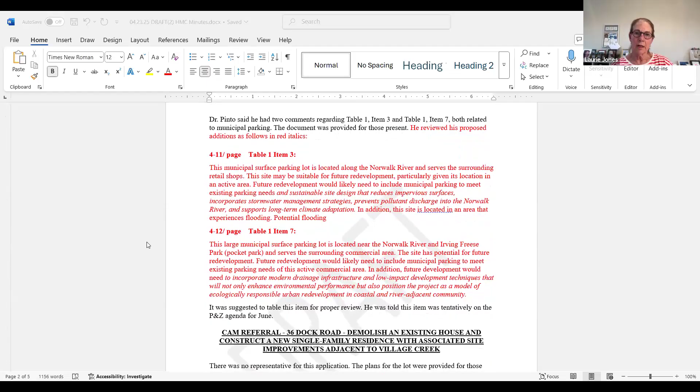Based on our legal review training, we're handling the latest minutes a little bit differently. Since the version you've seen, which is posted on the website, Dr. Pinto had a couple of edits. Amelia, you'll share your screen, and we'll go over those edits and then vote whether or not we approve Dr. Pinto's edits. They are in red. If you'll scroll down, we can all look at these together. These are the same language proposals he had raised at the last meeting, which we tabled to give commissioners time to review. Dr. Pinto asked that these be included in the minutes from last month to show that we had seen them.

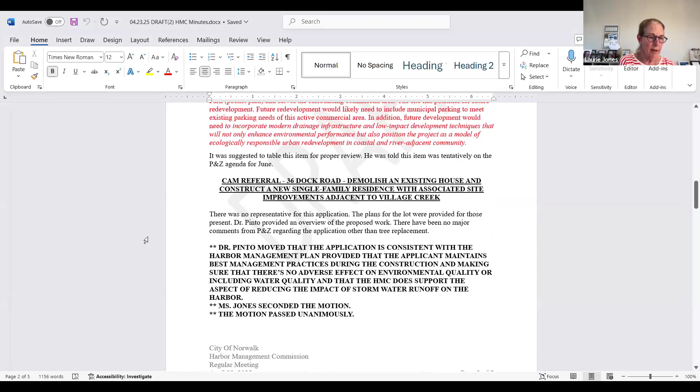This is the same language that hopefully you've all read by now, since it was sent out for review at tonight's meeting. Those are the recommended language changes for Table 1, Item 3 and Table 1, Item 7. Scrolling down, there's just one small language change in Chris MacDonnell's Finance Committee report, clarifying that the grant that was declined was from the city. It doesn't change the meaning of anything, but it clarifies it in a good way. So those are the three changes that were made.

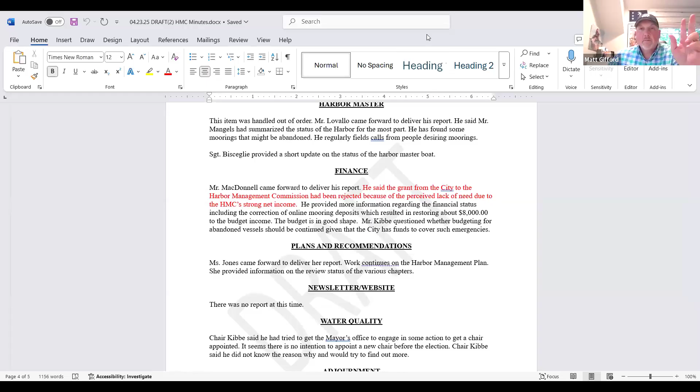Given those, do I have a motion to approve the minutes from our April 23rd meeting? I'll make that motion, Laurie. Thank you. Is there a second? Second. Thank you. All in favor? Aye. Any opposed? Great, the minutes are passed.

And that is the end of that portion of our meeting. Thank you very much, Laurie. Moving right ahead, the Application Review Committee - we have a lengthy agenda tonight.

Dr. Pinto: Thank you very much, Mr. Chairman. Just to re-echo what you talked about regarding the agenda - what I was trying to do, to expedite things, I consolidated by agent. So I've asked that, for example, Mr. Jim Bajek, who has two applications, go first and second, and then move along to the other agents, lumping them together so we don't have to jump back and forth between each participant. So the first item on the agenda is 86 Bluff Avenue, which is a COP.

This is an applicant from Phillip and Erin Kerr, requesting approval to reconstruct an existing dock and seawall currently in fair to poor condition. The seawall is approximately 120 feet in linear length and will be rebuilt first, raising its average elevation from about 7.1 to 8.1 feet through the addition of approximately 9 cubic yards of stone and mortar. The work will be completed using hand labor and a small operator-controlled mobile lift on the upland side to minimize any disturbance to the site. Following the seawall reconstruction, the dock will be replaced in kind with minor upgrades.

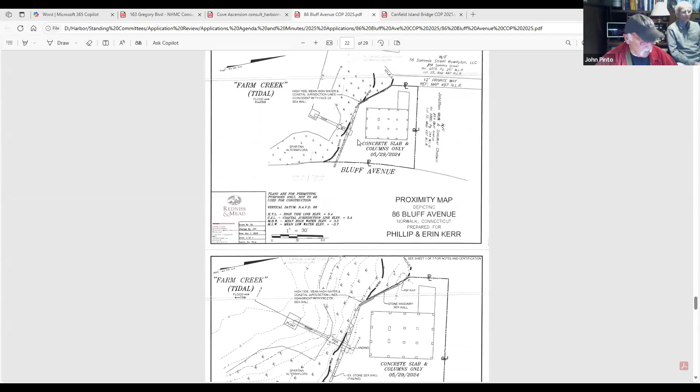Oh yeah, I guess we neglected to put them in. The dock is where it is, where it was permitted previously, obviously, and we're well within the 25-foot setback on both property lines. We just erred by not showing the extension of the property lines. So I hope that's okay in this case.

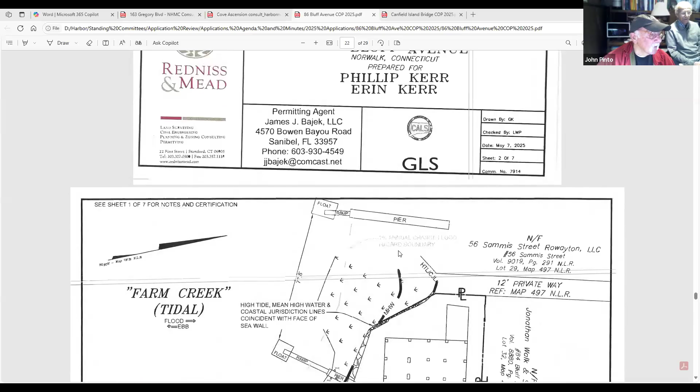I think with the understanding that the drawing would be amended to show the lines. Yeah, well, drawing, that's true. We have, let's see, this is it here, right? Yeah, we can certainly add that to the plans.

The property lines with Bluff Avenue, it's kind of hard to show an extension of that because Bluff Avenue's property line is curved. I don't know, there's certain rules usually followed with regard to the riparian rights. The surveyor knows how to do that as far as the curvature of the land, whether it follows a certain set point or some permanent boundary. I'm not exactly sure how that works here.

Well, we can certainly add those lines into the plans. That would be appreciated, Jim, just for completeness. Sure, be pleased to do that. Everything there is properly permitted. Yeah, there's nothing that's unpermitted.

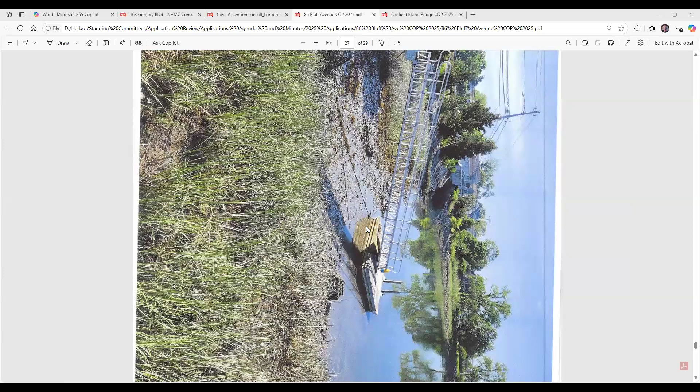Well, this was a dock that was previously in place, and you had permits previous to this application. That's correct, yep. And that was shown in that application here, I guess that was later on. Yeah, the dock was originally permitted in 1996 to the previous owner, permit number 1996-01383-MG.

As you see here from the example, the previous dock doesn't have float stops, for example, it's sitting on the bottom right here. Is that correct? Right, yeah. So that's going to be a change where you're going to have float stops to prevent the dock from sitting on the bottom for any appreciable tide cycle. Exactly.

And we're raising the pier elevation to coincide with DEP's requirement to have the bottom stringer at least 5 feet above mean high water. Right, right, okay.

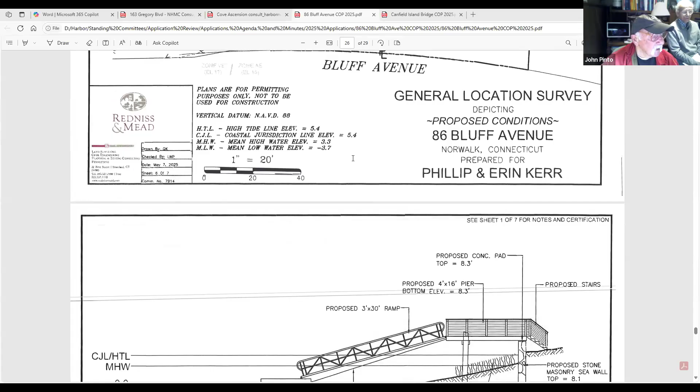No objection, with those understandings, that the drawing will be amended to show the extended lines and the distance between the proposed structure and the lines. Does any of the commissioners have any other comment or questions they want to ask?

I didn't really see any other changes, John, other than the float stops and a couple of elevation changes. Was that pretty much it? That was as far as I've seen, yes. Yeah, the pile's going to be reused and it's an improvement. So absolutely, yeah, it seems like a no-brainer.

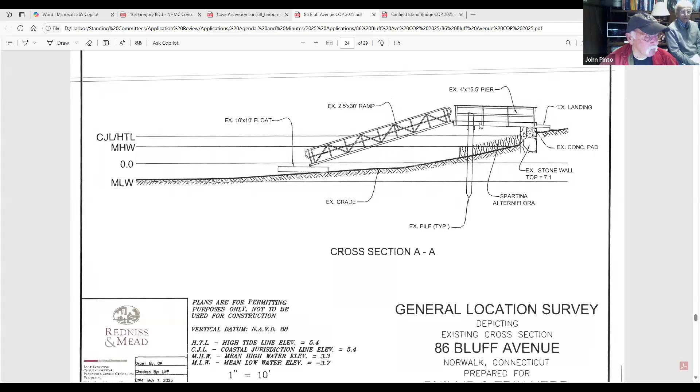In that instance, John, do you want to say it's consistent with the harbor management plan? Yeah, I guess we would certainly have no problem, no objection. It's pretty much the same, but it's certainly an improvement based on the previous dock structure there. Could make an argument it's consistent with the management plan.

So if anyone wants to make a recommendation that we find the application may be consistent with the harbor management plan, with the caveat that the drawings would be redone to place the riparian rights or riparian lines on that project, and then move forward with the project.

Yeah, John, I'll make that approval and put our standard language in with that association. All right, so that's 86 Bluff. We're going to find it consistent with plan. And then with the riparian lines, littoral lines, yeah, drawn in on that.

All right, all those in favor with that? I'll second the motion. Thank you, Jim. All right, all those in favor? Aye. Aye. Opposition? Any abstentions on that? Okay, so moved. Good. Thank you very much, Jim.

The next project is Canfield Island, Jim. This involves the Canfield Islands. It's a special taxing district, and they're seeking approval to perform necessary repairs on the existing bridge accessible to Canfield Island from the shoreline down near the beach area. The proposal supports a Connecticut COP application and includes a detailed inspection report with photographs. It's quite detailed.

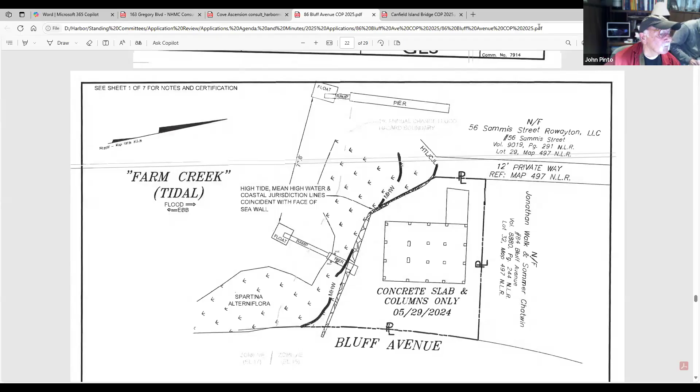Let me see if I can pull that up here. Let me stop sharing here. Where's it? Oh, here's stop share. And we have Canfield Island here. Okay, let me see. Is that still, are we still sharing? No, we're not still sharing. Hold on. Share. And we're going to share here.

Okay, all right. So what we're looking at here is the Canfield Island Bridge. Sprite Island Yacht Club is down in this direction here. And this is the Canfield Bridge, the Canfield Island Bridge, which they plan to refurbish.

I can briefly cover the scope of work. The scope involves support piling rehabilitation. Each existing pile will be encased in a fiberglass reinforced plastic and carbon fiber sleeve, extending approximately 2 feet below the substrate. Metal reinforcing rods will be inserted between the sleeves and pilings, filled with an epoxy-based mortar.

So it's probably the actual construction. They're going to be replacing the cross-bracing. The existing timber cross-bracing will be removed and replaced with galvanized steel to improve long-term durability in the marine environment. Also, the decking replacement: deteriorating timber decking and the railings will be fully replaced with materials that replicate the original appearance while meeting modern safety standards.

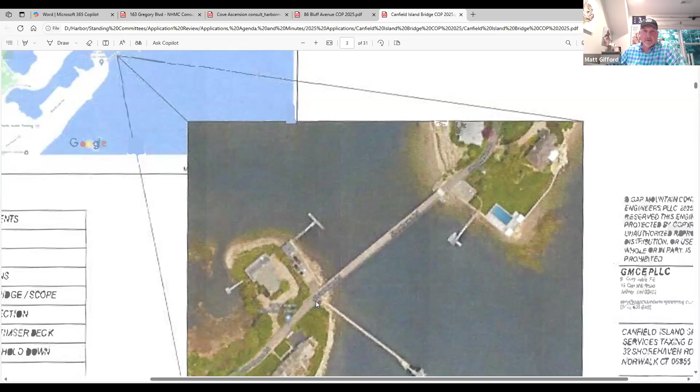You're going on the other side, John. Right there is where the gate is. But I thought the city-owned portion of the road, I don't know the legal terminology, but I thought it was like 2 or 3 blocks more down to the left of the page. Down here, out of view? I don't know, it's too blurred in that view. Right, because it's all Shorehaven Road.

The point there being, as far as my follow-up question: Jim, do you know the last time this bridge was inspected? Yeah, we have that inspection report. Is it like an official biennial inspection submitted to the DOT? That's a good question. It's a very extensive report.

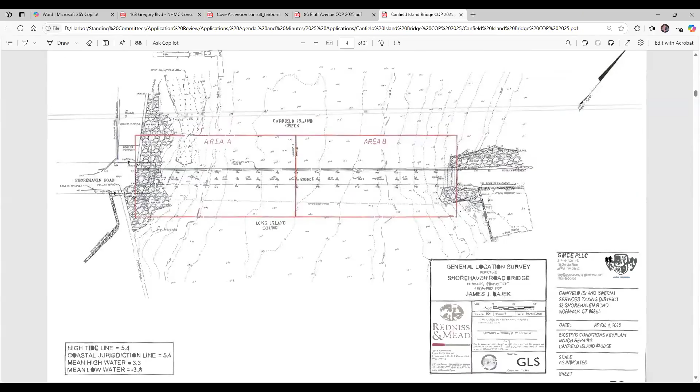It must have been at least done after Hurricane Sandy. Yes, the report's dated April 5th of 24. Because every bridge is supposed to be inspected every 2 years. Well, this was inspected in January of 21 prior to that, and those reports are meant to be submitted to the state and agencies. I expect that's why this inspection report was prepared.

Here's Shorehaven Road, it goes right up to the entrance of the bridge. Now, I don't know if Shorehaven Road is also a public right of way on the other side - that affects what's required by law. So that's part of the reason I was asking. You're talking about the other side, on Canfield Island itself, Chris? Yeah, in this area right here. No, on Canfield Island itself, is that a public road or not?

I don't know, or is it owned by the Canfield Island Association? Curious. As far as I know, that doesn't affect the actual work on the bridge itself or the project itself from the commission standpoint. No, I guess not specifically. I was wondering if it fell under the bridge inspection.

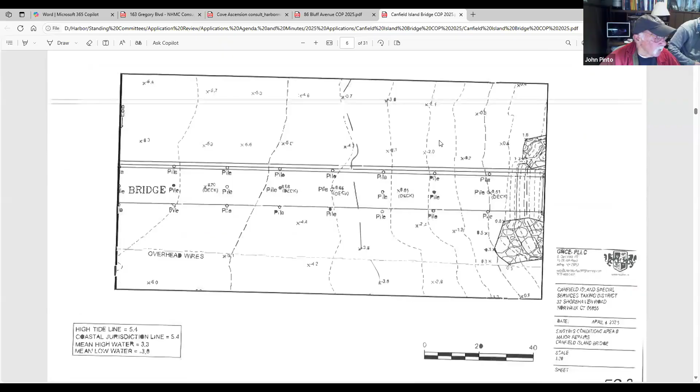Well, apparently they're going to be redoing the bridge. So you plan to start this summer, Jim? I'm thinking the earliest would be late summer. All right, so to move things along, we certainly find it consistent with the harbor management plan, along with the caveat that we'd recommend the Shellfish Commission provide comment, as long as the Bureau of Aquaculture requires comment on the construction of the bridge.

And the common language about best management practices. That's what we usually incorporate, especially when we have work barges in the area, so the best management practices ensure vessels do not affect any portion of the substrate during low tide. So, all right.

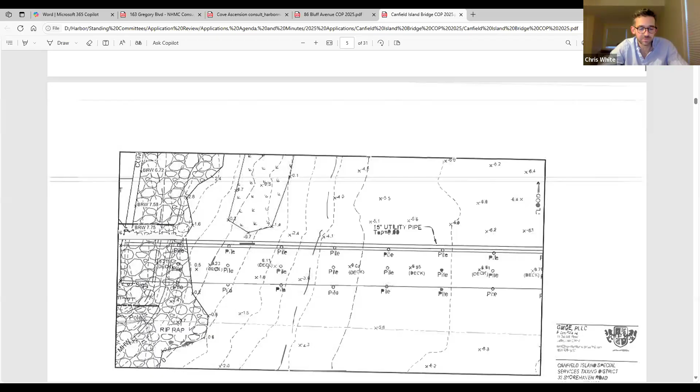Yeah, I think that sounds good. Anyone would like to make a motion on that? I'll make that motion, that it's in line with the harbor management plan and all of our standard language. The standard language being, as far as best management practices.

Reviewed by the Shellfish Commission and Bureau of Aquaculture, and being consistent with the harbor management plan. All right, all those in favor? You need a second. I'll second that, John. Okay, thank you, Matt. All right, all those in favor? Aye. Aye. Any abstentions or nays? Okay, we'll move forward on that one.

Thank you very much. That's good. Thank you very much for putting both of these projects together like that for me, and made my life a little easier this evening. Anything that can help out, Jim. Thank you, John. Appreciate it. Thanks, Jim. Yeah, Jim. Yep, Jim.

All right, so the next application is with Land Tech. Tom, I think Tom is here. Tom Ryder. Is Tom here? Yes, I am. Good morning. Good evening. This is 163 Gregory Boulevard.

This is a pre-application, and the project is to construct a residential dock consisting of a 16-foot long by 4-foot wide fixed pier, supported by 4 pilings, and a 36-foot long by 3-foot wide ramp to a 20-foot by 5-foot wide float, with a 6-foot by 5-foot landing supported by two piles.

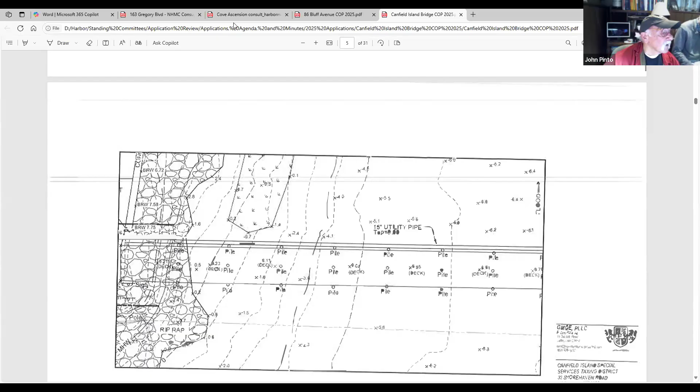Let me see if I can get that up here. Let me see, where is that, right here. Is that still, could you see? Yeah, can we see it, John? Oh, it's there. Okay, good. I wasn't sure whether it's on the same screen or not here when I do the screen sharing. All right, so the application here is at 163 Gregory Boulevard.

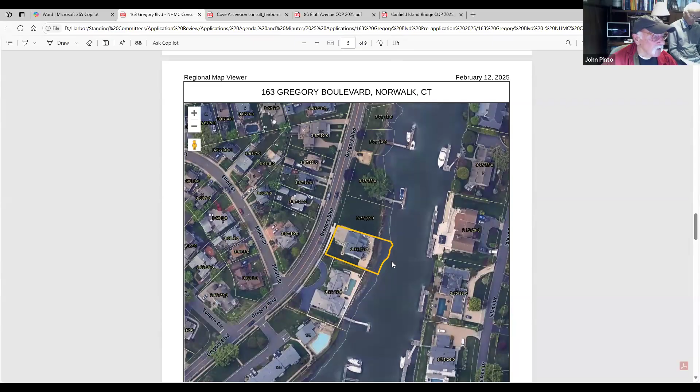And what the applicant is planning to do is put a dock extending this area right here. We looked at this, and maybe Tom, you can help us out with regard to the distance from shore to side to side. Well, the next figure shows that. Yeah, on the next page there's the setbacks. There you go, right here.

Okay, yeah, not a problem. We have an issue with regard to the fairway that we're dealing with, because we're dealing with a narrow fairway here with regard to boat traffic, and in this case. But what we're trying to understand now, it's a slightly different view here. Is that right now, Tom?

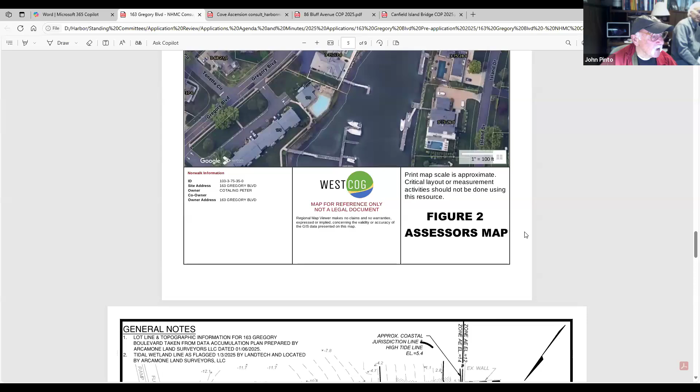I'm looking at it. Well, it is, yes. North is to the southwest. North is like 7 o'clock. Yes, east is. So in other words, this view here that we're looking at. Well, if you scroll down to the last figure, it's all put into perspective of an aerial.

Which one here? Oh, here we are. Okay, here, this one. Yeah, it just shows an aerial. It shows distances for other docks, in proximity to other docks, and kind of spatially understands where everything's going to happen. You're not talking about this diagram here, are you? Yeah, he is talking about that, that's the same orientation as that. Yeah, it's the same one, that's the orientation, just has the numbers. I think it's a better figure for discussion, is all my point was.

Okay, all right. So we're concerned certainly about the distance that we have here and the extension of this dock, that's certainly going to be probably halfway into the fairway here. But obviously there's not going to be any opposing dock in this area right here. And let's see.

There's two things, John, that in Charles Creek that the harbor management plan establishes. One is the navigation fairway that follows the dredging approval that was given to Charles Creek Association, and that's back in 2000 or thereabouts. I don't know if that fairway goes up this far, but in addition to the fairway, we also call for a minimum 55 foot of unobstructed waterway width between. I'd have to go back and look at my records on that one.

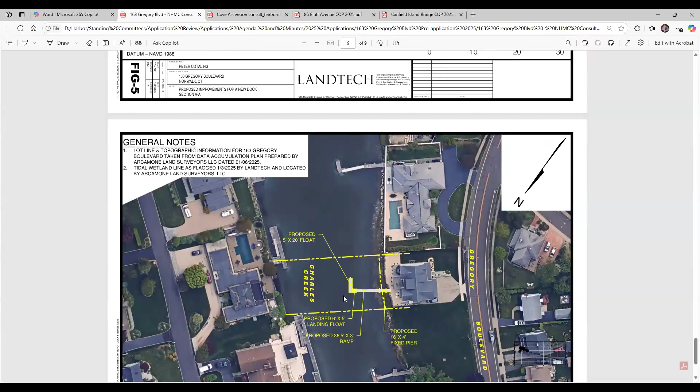I'm looking at figure 4 here, one above it—sorry, 2 above it—measuring that out on the scale in front of me, looking from width to width here.

It's 140 feet from mean high. I don't actually see the mean high on the other side, but you're talking this area right here, Tom. This is the dock here on that other side. There's actually nothing here—no dock or obstruction.

It's a bulkhead, but there's one just up at the top of the sheet, labeled float. There's a float there, and there's one to the south, at the bottom of the page—these two objects here, and here. But there's nothing adjacent to that right here.

Yeah, you're not creating a slalom course either. So 55 feet would assume stationing of boats on the docks as well.

If you look at the distance between those two floats we just pointed out on the left hand of the figure and the proposed floats on our property, there is approximately 72 feet between the two. That's the clear distance between the floats—it doesn't include stationing of boats on there, which also obstructs the channel.

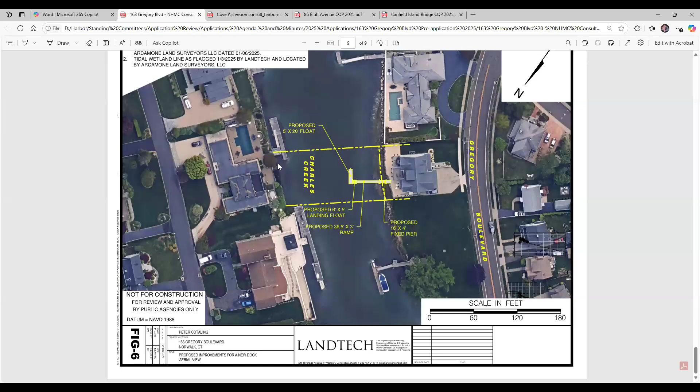There's no facility there. Let me show you—if I subtract 10 feet from either side, just for a 10 foot beam, easy math: from the one at the bottom of the page, where it says float, bottom left corner, to the bottom left corner of our proposed float, that distance is 72 feet. So then 62 feet, 52 feet—you have 52 feet between those two, assuming a 10-foot wide beam.

Are you doing a diagonal, or something? No, that doesn't work—you have to draw a line between the two floats and do something at 90 degrees to it. That's a diagonal line you're drawing out here, right, from here to here? Yeah, minus 20 feet for the beams for each boat.

That's what I just thought, that was an easy way for a discussion. If there's a way, let me know. So when the Charles Creek Fairway was established, are there actual northing and easting points for that? GPS, longitude, latitude points? Are they available? I can put them on if they're available.

The fairway was established in accordance with the dredge approval for the Charles Creek Association. That was the formal fairway. Outside of that, the policy was to maintain 55 feet of unobstructed water area from structures on both sides.

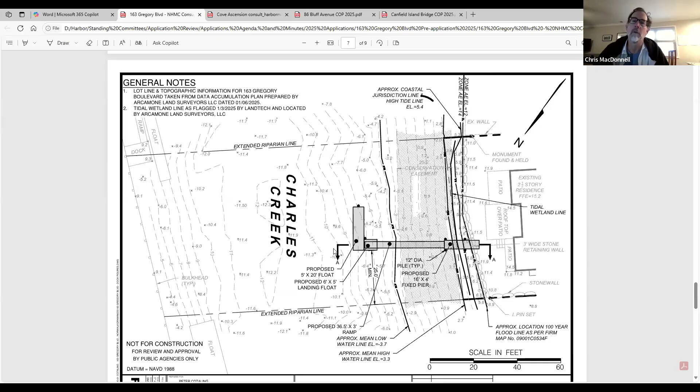If you go to that picture, John, can we determine the distance from that blue boat above the yellow structure, 3-75-38-0? What's the distance from that dock to the opposing dock? It seems like that's the narrowest area right there. Am I right, you're talking from here to here?

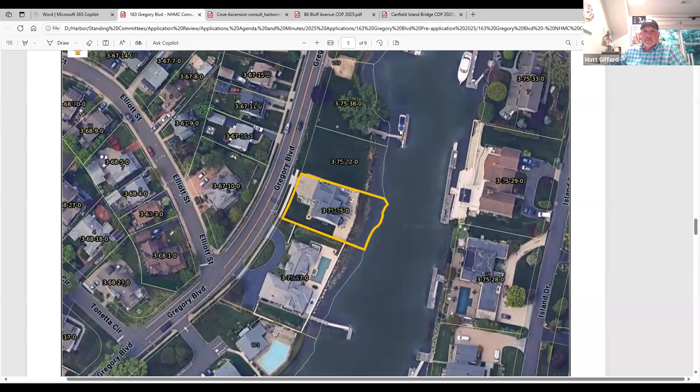Yeah, if you go just above that blue boat across the creek, I can figure that out right now, I have that in front of me. 65 feet if I scale it off of Google Earth.

Well, I have a scale, let me see here. Chris, you mean talking about this distance here, 65 feet? Yeah, I'll double check it. I can zoom in closer.

Because if the property owner directly across ever wanted to continue a dock, just assuming worst case scenario, what would that be versus? I've got 68 feet, yeah, I did it closer, 68 feet.

So the dock proposal will fit within this yellow boundary, Tom? It's going to extend out more here. I don't have that knowledge that the dock would fit within that boundary.

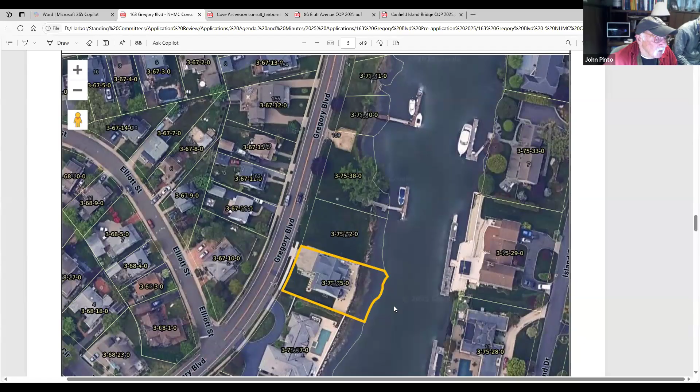It'll fit within the extended riparian lines, but I'm not sure it's going to fit with, I don't have that information to know what you're measuring. You're measuring for where the dock is going to be extending out in this region right here, correct? And then we have this distance here to worry about.

This is like a little narrow section here. Not sure what we need to do on this one. This is a pre-application. Could you request some more dimensions, John?

We need a policy on what dimensions we're enforcing. Yes, they need to supply more dimensions, but at the same time, is there a fairway there? Is there not a fairway there? Is it a 55-foot fairway? Does a 55-foot fairway preclude the stationing of boats in the fairway?

We can't answer that, we can't give him any guidance without having those policies ourselves. The policy was to provide for a minimum 55-foot unobstructed waterway width. Okay, that's good, that precludes boats being stationed in it. Right, it precludes boats being in that 55-foot width.

So that isn't the clear distance of docks, that's dock plus some beam width, which should be at least 10 feet, if not 15. So does that width include the beam of the boats, or is it just dock to dock? No, it doesn't. You could not station a vessel in the fairway, within that 55-foot width.

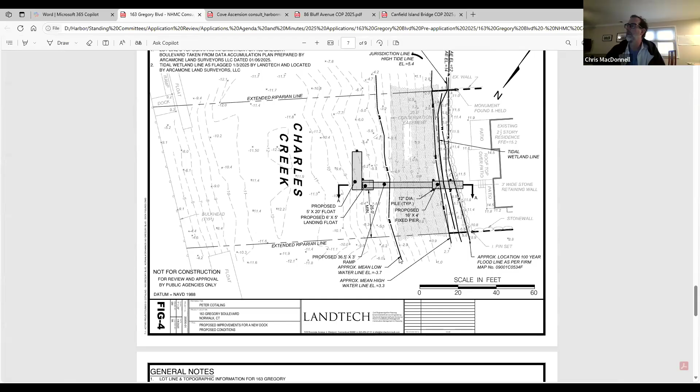Zoom out, yeah. Now, what I did was on that left-hand side of our proposed float, the waterward end of our proposed float, I drew a line that went all the way up from the two extended riparian lines. So I just drew a line all the way up and down from extended riparian line to extended riparian line on our waterward side of our float. I took the waterward side of our float and drew a line from end to end, from property line to property line. Then I measured off that distance to the float, to the bottom left and the top left on our photographs.

But that distance isn't shown on the drawing now, though, Tom. No, it's not. I'm trying to get some guidance from you guys, and I'm not being critical of that. I'm just asking for guidance as to how I can show things or adjust things to comply with what you need, is really what the question is.

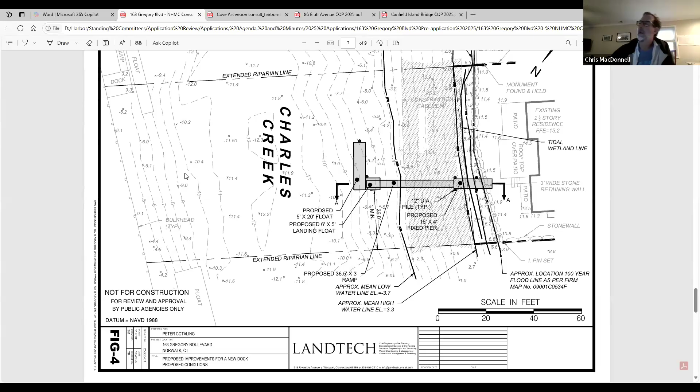Share, all right, tell me when you see that. We got it. Okay, so this is an extension of this dock to this dock that establishes this bulkhead line. Here's your proposed dock, a perpendicular line across that. From that corner to the other extension of the bulkhead line is 70 feet, 10 inches.

So if you had a 10-foot boat stationed here and a 10-foot boat stationed here, you would have a 50-foot passage, just about a 50 passage, that's correct. So based on that, it does meet the requirements, 55 feet if you want. Oh, 55 feet, I'm sorry, I was thinking 50 in my head. Excuse me.

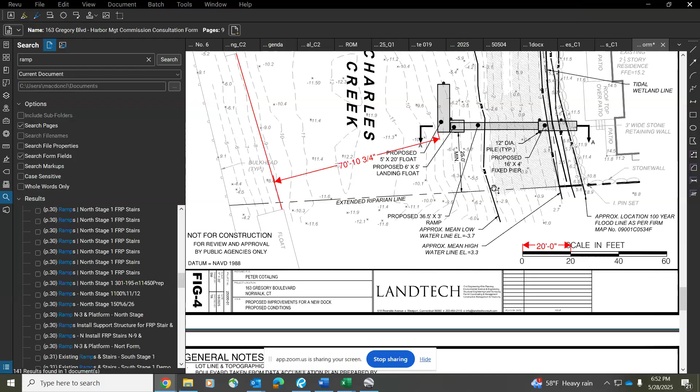All right, are we at the point where you're saying I just need to reduce this by 5 feet? Or are we at the point where I need to show some different dimensions and then we discuss it next time?

I think he should show the dimensions. It's up to Chris to show that. Yeah, this is what we would want to see. If when you come back to us, this is what we'd like to see. That looks kind of like the direction you wanted.

So that's what I would ask for. Yeah, I think that's the only thing, Tom, other than that you've put forward a lot of really great data, so I think that's the only thing to kind of circle up.

Okay, so what I'm seeing here on the screen is what you want shown on our plan. Right, take a screenshot, Tom. Yeah, well, I got it. I already drew it on mine.

Well, Tom, you have more accurate numbers, I would imagine. All right, Chris, are these accurate numbers? Yeah, I just scaled it off of his drawing. Well, he's a surveyor, so I think he would have more accurate numbers. Sure, yes, it's his. His surveyor's got to sign it.

I have a scale drawing in front of me and I'm using a scale, and it came to the same number. I'm a PE, but I'm not going to sign this for you.

All right, so what I'm saying is that's what I will show on the revised figure. Okay, so we'll wait till next month to see it? Well, I can send it to you tomorrow, but we're probably not going to be discussing it until next month, right? Okay, then I'll send it to you for next month.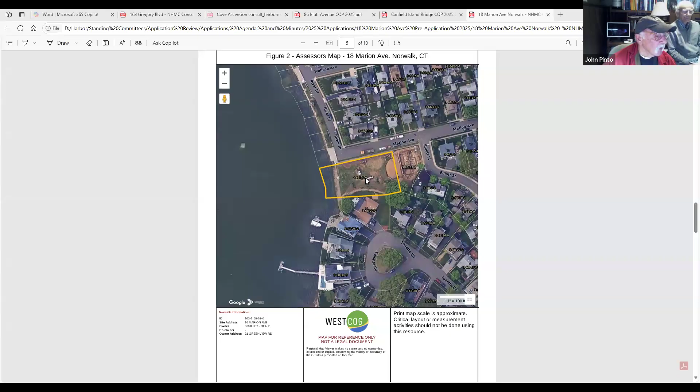Over here, they want to extend the dock out in this region here. Let me see. Here's the lot, Norwalk Harbor. The last figure shows it on an aerial.

We always kind of include that because I really think it's good for the reviewer and for the DEP and us to see everything on an aerial, so we always include that as the last figure. So what you're proposing is this is all new dock construction right here, extending it out into the harbor in this direction here.

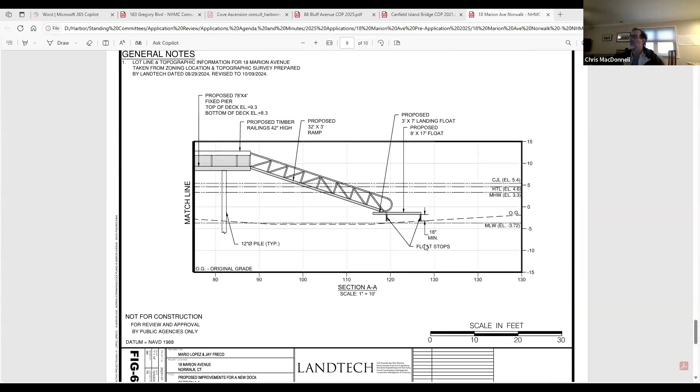Any commissioners have any comment about that? Need to see the relationship to mean low water. Let me see where we got that here. Let's see. Going back, let me go back more. Right here - okay, they have... mean high water level, 3 feet.

I can't see this here. So the fixed pier, Tom, goes to mean low water? Well, this took a little bit of finagling - not finagling, I shouldn't say it that way - but we went through a number of revisions on that, because you'll see this triangular trapezoidal type of thing, which is defined by the mean low water line. That is a kind of a small depression - as you can see, it's around minus 4.2 and minus 5.5.

So we're trying to figure out how to get the dock to be useful. We have these two mean low water lines that we're kind of working around, and this seemed like the best scenario, you know what I'm saying. There's this little depression in here, but if you go off the site about 10 o'clock there where it says proposed 17 by 8, that continues on and then it stops. So there's really just this little depression - that mean low water line is just kind of a little basin.

Wait, where are you talking about? Let's see, whereabouts are you talking about now? No, the mean low water line - you can see it as kind of its own polygon, and all I'm saying is that it continues just off the figure to the left there and kind of curls back around, so the mean low water line just kind of defines a little basin in there, is all I was trying to get at. Right in here? Oh, in this area right here. Yeah, there you go, that one. Yes.

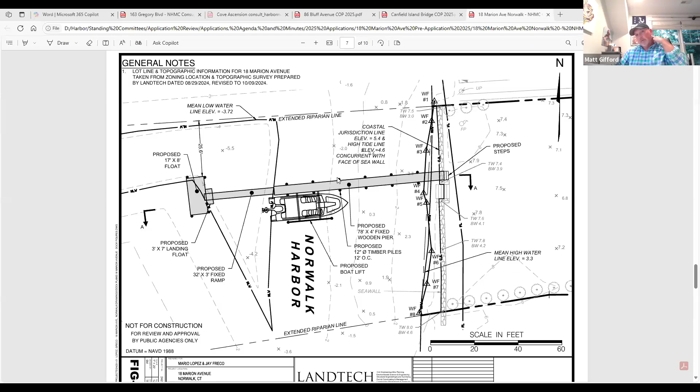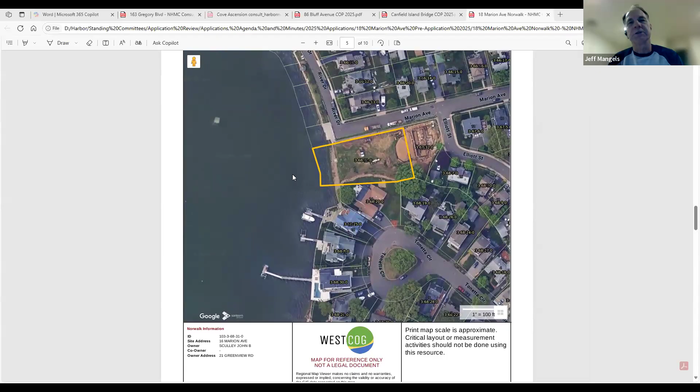Just seeing what any of the other areas look like. So this is going to extend out just in this direction, a little farther. There's an aerial, the last image. The last one shows the location. Keep going down, the last one shows the aerial. There we go. Yeah, so that's the one I was looking at more than anything.

As long as Shellfish can weigh in on this. I know there was one other we had already talked about to get their comments on. Yeah, and I'm pretty sure we previously approved that one all the way at the bottom of the screen, at the bottom of that image, right Matt? Didn't we? I think there was one we approved that hasn't been installed, somewhere down in that same neck of the woods, right? Yeah, I think it's actually just right about where that cursor is, somewhere in that area.

Yeah, because that was initially an extremely long one that they tailored back. Right, okay, that's what I was thinking. Just because obviously the end of Marion is a beach. And if you see that one just below the highlighted area, that's a boat lift currently there. You see that boat that's over currently here, right there? Yeah, that's a current boat lift.

All right, so... anyone? There's something else to add. Not on this one, John.

Tom, I think, as I said, if any commissioners have any objection to having the application move forward, again, with the aspect of review by Shellfish and also aquaculture. I think that was it as far as any other comments are concerned. We'd like to make a motion that we have no objection to this application moving forward. I'll make that motion, with those conditions being review by Shellfish and aquaculture for that particular area, because I know Shellfish is particularly interested. That's been a main interest to Shellfish with regard to the shellfish boats going in and out of that area and making sure the substrate is well tended to.

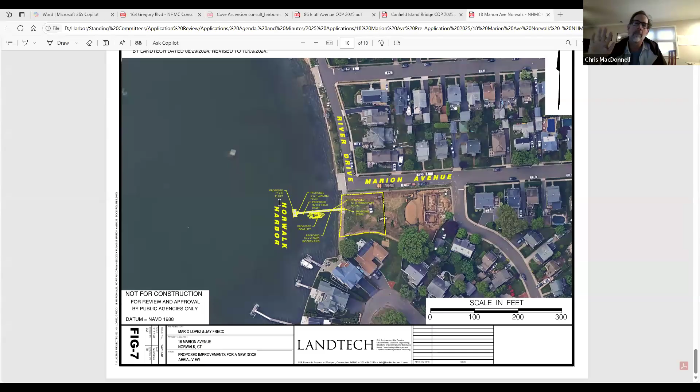So all those in favor with that motion, aye. Aye. Any abstentions? Any objections? Okay, so move forward on that one. Great. With that, I appreciate your efforts tonight and the conversation.

Thank you. Before you leave, Tom, just going back to the Charles Creek Navigation Fairway. I will have to double check this, but I believe the navigation fairway that we identified based on the dredging permit goes all the way up the creek, up to the upper extent. But we'll confirm that and get a copy of that COP permit. It does appear to go all the way up through the entire Charles Creek.

Okay, well, if it's located on the COP, I'll get that from DEP as well, just for our records. And if you want to send it to me as well, I'd appreciate it, but I need to look at the wording and stuff. Anyway, I appreciate the comment on that.

Thank you. And the number is COP 2007-073-SM. Okay, thank you. Thank you all. All right, great.

Okay, so our next application is from King Industry, and I think we've reviewed such an application several times, in 2018 and again in 2023, so we should move quickly on this one. This is a permit for King Industry: a notice of tentative determination to approve an application submitted by King Industry to discharge a maximum of 47,000 gallons per day of tank farm stormwater, cooling tower blowdown, steam condensate from boilers, and fire sprinkler testing wastewater to the Norwalk River from operations at their organic chemical plant manufacturing facility.

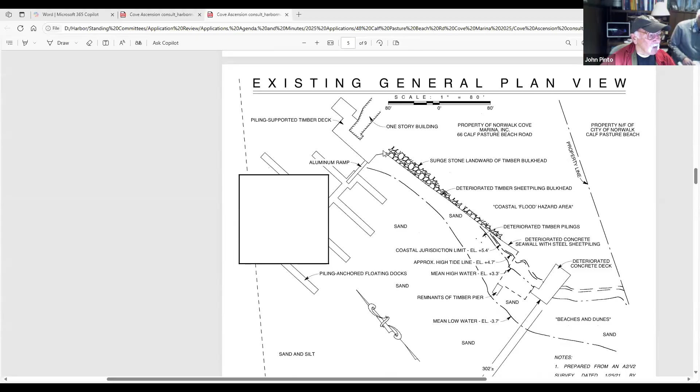All right, so we're talking about Norwalk Cove Marina, and the applicant proposes to replace the deteriorated bulkhead. We're talking about this bulkhead here, right here, John. Is that correct? Yes, that's right.

It says we propose replacing the deteriorated bulkhead and a seawall, and that seawall is down there. Basically it's a hybrid of the bulkhead and seawall together with a new steel bulkhead, using both barge-borne and land-based equipment to limit shoreline disruption. Sand will be dredged either with a barge-mounted dredge or a land-based excavator with an extended boom, then placed into geotubes on the upland for dewatering.

The existing timber wave wall will be removed using barge equipment, with all debris collected and disposed of at a licensed upland facility. For the new breakwater, steel sheet pilings and structural supports will be installed with the barge, followed by placement of geotubes and armored stone.

I'll have to find out, I'd like to know what armored stone is. And clean granular fill within the breakwater footprint using both land-based and barge-borne methods. The project will conclude with the installation of timber decking and railings by crews working from the upland side.

So as I understand, John, this is all going to be removed here, and we go down here. I guess this is the new construction in this area right here, John? Exactly, a new bulkhead basically along the shoreline, replacing the deteriorated one.

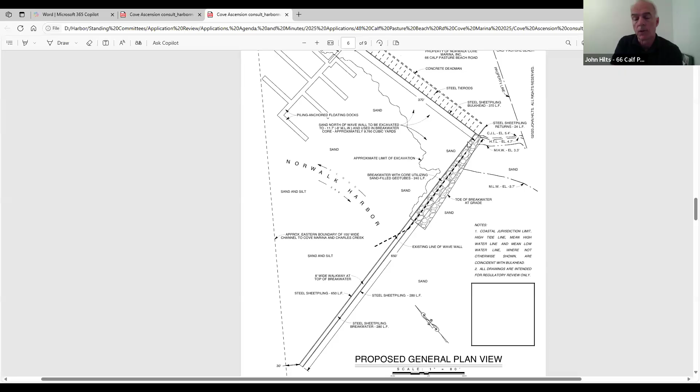Families finally decided they have to address the bulkheading, obviously. In years subsequent to Sandy, and also even before then, the marina basin immediately north of the wave wall has seen the installation of larger floating docks to accommodate larger vessels, and those vessels need a greater degree of protection than what has historically been provided by the wave wall.

So basically, this is all going to be new construction here. Yes, sir, exactly. So basically, extend it, replace it with something more substantial.

Your question about armor stone - it's basically riprap. So we're armoring the side of the newly constructed breakwater with stone, all in this area right here. Yes, sir, exactly. It's a hybrid design - basically we didn't want to run steel on both sides continuously if it was unnecessary.

There are a couple of reasons we decided to do that. Obviously the stone is a hard surface that will be conducive to the recruitment and propagation of oysters. And there's that aspect we like, plus the engineer looking at it liked the ability to deflect some of the wave energy using those stones.

So now the dredging - you're not doing any serious dredging in this area here. Where is the dredging going to be? The dredging is basically landward of here, you can see the approximate limit of excavation - that line right there, all in here. Yeah, exactly. That appears to be primarily sandy soils accreted, and that's more conducive to what we're trying to do with backfilling the area between the breakwater.

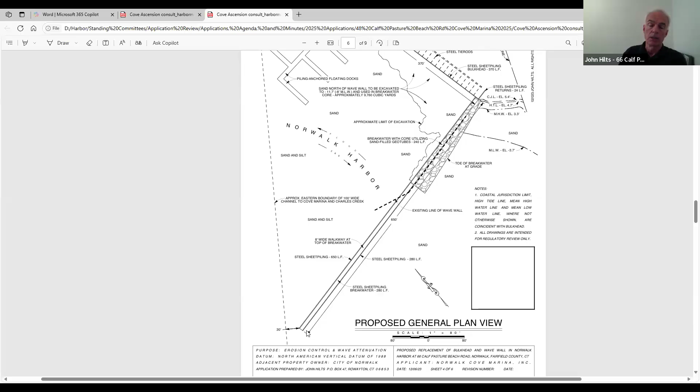Is this going to be lighted at the end? I'm sure - this is obviously going to go to the Army, and the Army will refer to the Coast Guard. I'm sure the Coast Guard will want adequate safety lighting as prescribed by them.

I have a view of the plan that shows it from a higher elevation. I think the assessor's map is best. So we can just see the crook of the existing wave breaker. Now how far out into - well, this is the existing wall right now, isn't it? No, that's the wave wall south of Shore and Country. Oh, okay, where the yellow is. I'm sorry, right in here - that's the beginning of Charles Creek Cove. So it goes out - I can see the little crook in the existing. Right there, exactly. And faintly you can see the channel, the dredge channel that leads up into Charles Creek as well.

So this goes out to the edge of the channel, where we see those waves right there? This is going to extend out in this direction here, John, right? Yes sir, but not quite that far. What I'm saying is it's going to protect this mooring here. Yes, but it goes out to within 30 feet of the existing channel, a little further out than your white arrow, right? Let's see, I'm just trying to guesstimate from what you have here - here's the docks. That's going to extend out, I don't have a distance measurement there. 650 feet is what it's labeled.

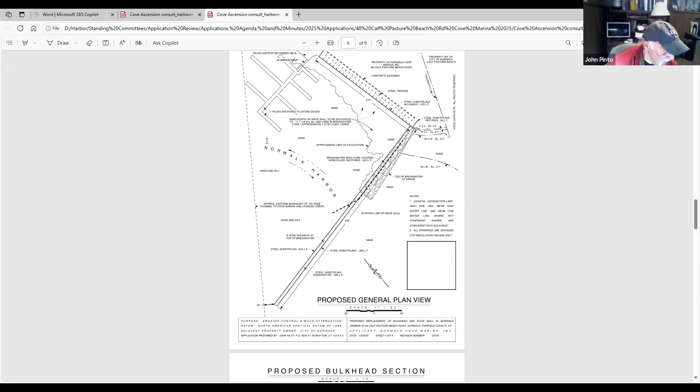And the current one's about 325 feet or some such distance, steel sheeting 650 linear feet. Yeah, this is showing 30 feet from the channel. So that's a very big change in my experience out there. Yeah, somebody will run into that. I mean, it's huge.

Again, it would be helpful to have a drawing that shows this in relationship to the beach on the other side and the rest of the harbor and the navigation channel, because it really doesn't tell the whole story, I don't think. Well, can you see it aligned with the other docks that are currently there?

Just a rough perspective. If you zoom out there, John. Right, you mean we can see the little angle dotted line here? No, I'm saying, so you can see the end of the proposed pier, and then you can look vertically on that drawing to see where the docks are. So then if you look at the other drawing that they had with the yellow, that was the Google Earth topical thing. You can essentially line it up in your brain, so you can see it'll hit the end of that float, that's about where it'll extend to.

I'm not sure what we're looking at here with this little jog. This is the way it's going to extend, this little yellow tail coming out from the land. Yeah, talking about this here. It'll go twice as far from the land as that. Yeah, there you go, exactly.

So I'm saying it'll line up as you look perpendicularly, as you look vertically down with the upper end of the docks that are currently sitting there. Yeah, that's what it showed. If you draw a line from here all the way out to here, it's probably right about in here.

I mean, with the 30 feet of the channel, you can see the channel by the boat wakes. I can put up a better image. You want me to share?

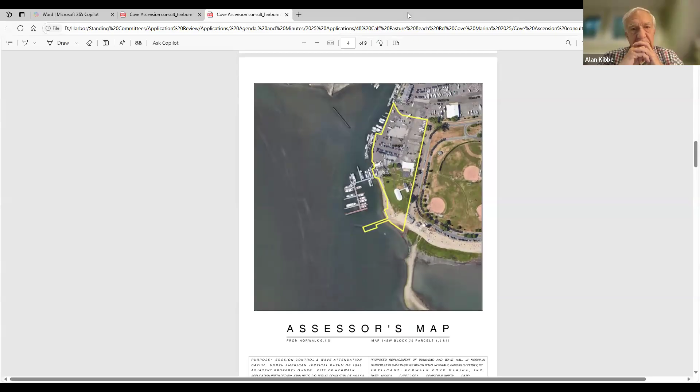I mean, definitely proper marking will be required for sure. Yeah, could you review, Chris? The current thing is unlit and it's a wreck, so in terms of navigational hazards, you're improving the waterway from what you currently have. Well, if it's lit, the other one doesn't extend out farther than a dock, which is very visible.

You see the dock, the top left of this picture here, the piling anchored floating dock. And if you follow that piling anchored floating dock towards the stone breakwater, it really is all of this sheet pile that is beyond that perpendicular line. Do you see what I'm saying?

Mm-hmm. Yeah. Can I share an image? Can I share my screen? I'll stop here. All right, Chris. Okay, go on.

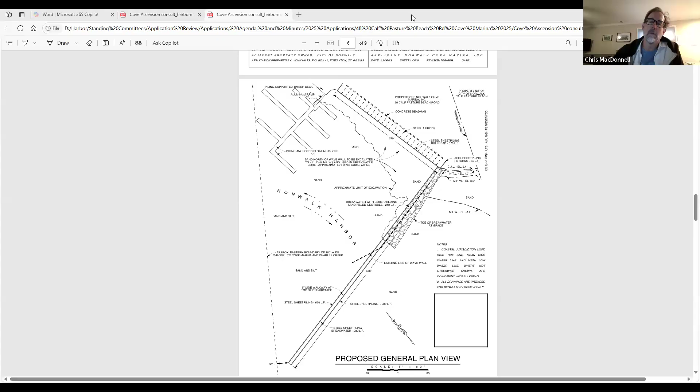All right, so this starts at this point here. There's an existing seawall and then all the accreted sand and some old structure foundation. That's all coming out, right? Yep. So 650 feet from there out into the harbor is there.

So this guy would hit it. I'm just saying, people coming in making the turn into the marina here, it's something they're going to have to be aware of and go around.

Oh no, it's definitely going to require, it's going to have to be lighted. Yes, just light, that's not a question. We have no problem with that.

Very few people cut that corner, let's put it this way. People going in there are the customers of the people who are building it, and they don't want to do anything to their customers. And it's a lot, people tend to avoid that because the bar is there, the sandbar. So when that boat is going across, there's actually a little bit of a raised portion. There's some shoaling going on right there as well. So very few people cut that corner, but it needs to be illuminated for sure.

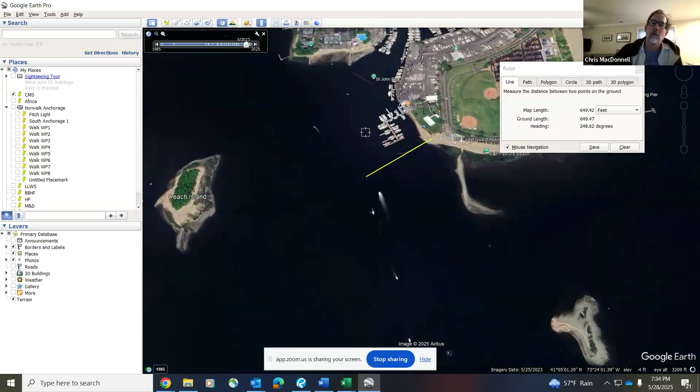Is that a vessel moving in toward the breakwater? Yeah, it is. That's right up pretty far.

And John, you said you had discussions with the Corps and DEP on that too? So far, just DEP. And the Coast Guard and the Army Corps are going to be weighing in on that? When you apply to the Army Corps, yeah, the Coast Guard will definitely, automatically have their say.

Because we're certainly all for protecting wind and wave action, but since this is a pre-application, might the recommendation be to have no objection to it moving forward, but with the understanding that during the regulatory process, additional consideration will be given to the proper extent of the structure so as not to adversely affect navigation patterns.

I think that, well, there's navigation, there's the flow of water in and out of the harbor. There's a significant change to the hydrodynamics going on here. And that would be the other consideration too. I don't know who analyzes and approves that.

Well, what we're hoping to see is the accretion of sand at the south face of this, which basically creates beach, not only for Ascension, but also associated with Calf Pasture.

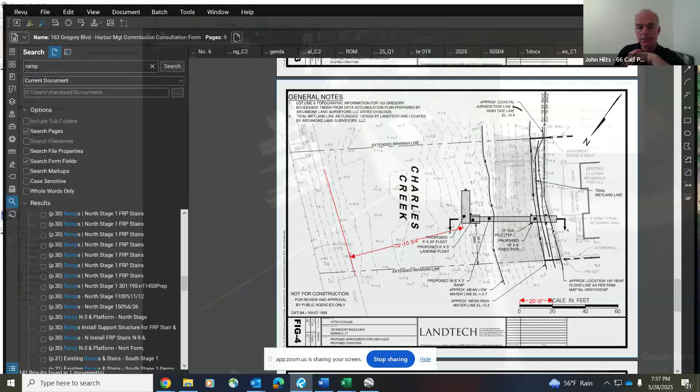Well, wouldn't DEP, John, require you as part of the application to have an engineering analysis of the impacts? Oh yeah, this isn't my design. This is in conjunction with a licensed engineer, Jeff. I think that analysis would have to include a discussion of the potential impacts on navigation safety and also the water flow conditions in the harbor.

Right, what do you call it - the erosion. Yeah, the erosion. Potential impacts of the design. It may, Jeff, I don't know. I mean, it's definitely, because it's an erosion control structure, particularly the bulkhead, the engineer has to address the questions pertaining to that. As far as the wave resistance, yes, there's that. That has to be addressed as well.

I know, just based on my experience with the site over 40 years now, that the wave wall itself hasn't done what it was intended to do. And furthermore, the wave wall is a remnant of a time when the docks you're looking at on this screen share weren't there. That area wasn't populated by any floating docks, and no vessels were berthed there other than occasionally barges associated with other activities of the family's businesses.

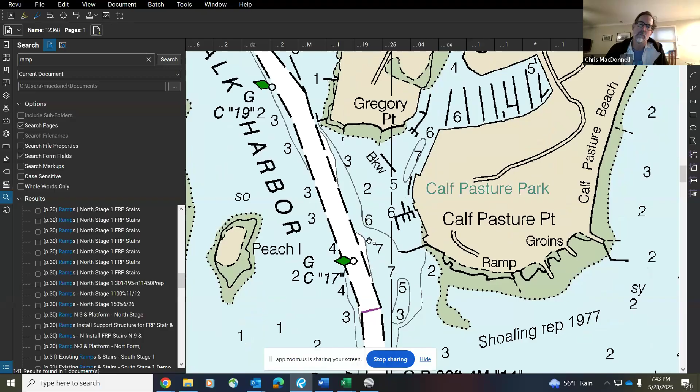Let me show you that now, I put up the chart. So we're talking about going into 7-foot deep water here, trying to go within 30 feet of that channel. Here's the shoal somebody else was pointing out before, and there's the sandbar that comes off the beach here.

Yeah, they have to show. There's the existing wooden wave breakers there. That's going to come very close to the federal channel. Right, so the entire harbor drains. Well, this is mud flats here, right? So most of the channel is here, and we're blocking it.

That comes out right. Yeah, you can see the wave breaker right there. Well, right where the number 7 is, right there is going to be the end of that breakwater. And I'm not just saying this because I'll have to tack around it in my sailboat when I come in.

All biases on the table, but everything has to be addressed. You're absolutely right, any impacts to navigation, particularly if you come close to the federal channel or even the setback of the federal channel, it's a Section 408 review. It doesn't just get rubber stamped, it all needs to be addressed. But at this point, DEP is going through the DEP's procedures. You guys are next on the list, and that's why we're here tonight.

One request could be to provide another drawing, John, showing the relationship of it to the federal channel, because what I can probably do that's best is actually show it.

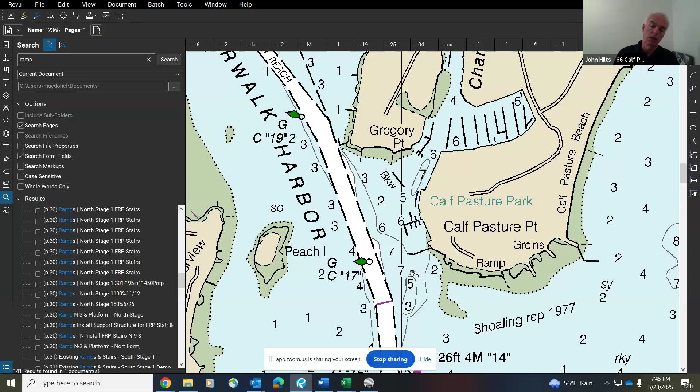That's fine. I think the thing you can look at here and now is the fact that it's 30 feet from the Charles Creek channel, which you have information on, and that's basically shown on the survey this was prepared by. But if you need more information, that's fine.

Well, perhaps we can table that application till next month. Do we see a revised plan in relation to the Federal Navigation Channel? If you don't mind, John, can you just shoot me an email with specifics or something, I'm happy to prepare it. All right, relationship to the federal channel.

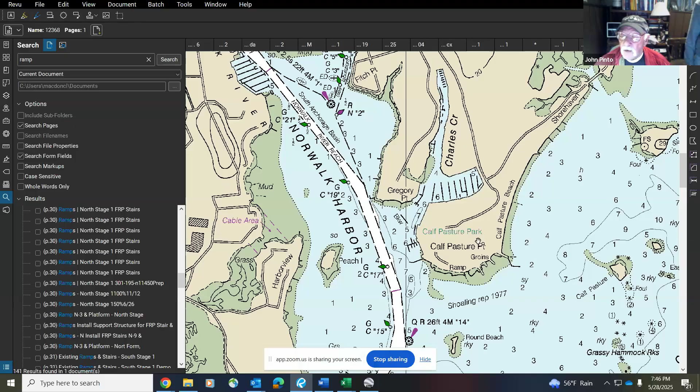So anything else you want to add besides relation, Chris, Matt, anything you want to add in relationship to, let's say, the bulkhead to the federal channel? Anything else you might add?

Anything, Chris? No, it should show the depths. So is this going to be sheet piling all the way out? Is it going to be water surface to the bottom? How high above mean high water does it extend? That's shown in the section views.

Okay. Let me see here. All right, well, these maps and these sketches don't really provide any information.

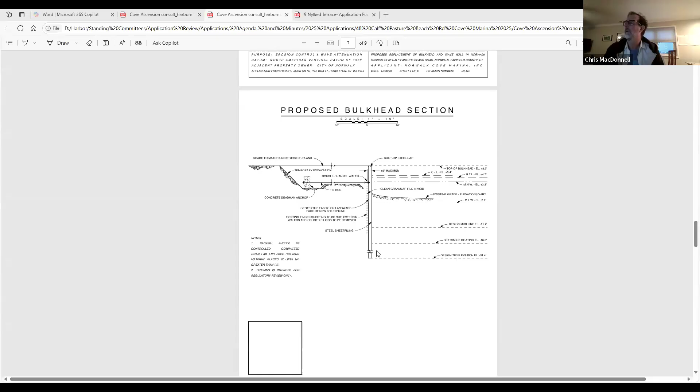There's the section, that's the bulkhead that goes, yeah. And then if you continue to scroll, John, I think you'll see the section views for the breakwater. Down more? Yep, yeah, right here.

Oh I see, these are small armor stone. Okay, right, so scroll back up. It's more the part that extends out into the... So it's... No, that is the bulkhead along the shore. That is not the view. Oh, the bulkhead along the shore.

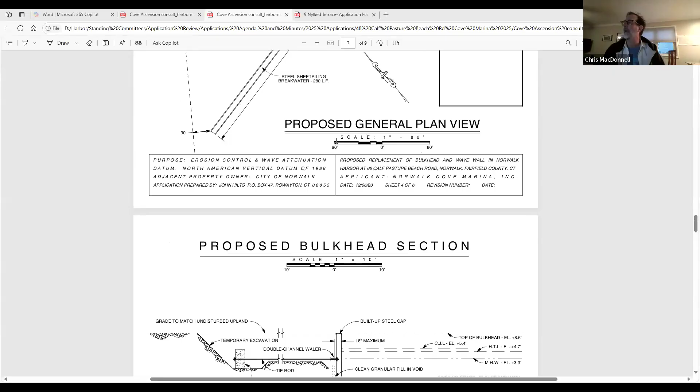So what's the part past the armored part? Roll the other way, please. Down, down, there, next, we go. There you go, this here? No, that's actually the survey which everything was based on.

Well, that's it, all we have. You went past it, John. Past it? Oh, I'm sorry. There you go, stop right there. Okay, right, there you go. So this is the area here you plan to put all the clean fill between the two double bulkhead here.

Exactly. I got you. Is the top going to be a promenade? It's going to have a deck on it. A public access deck, or is that a maintenance area? I don't see why it wouldn't be a public access deck. Well, liability is one reason. I'm just curious. Well, code compliant railing. Okay.

But it's sheet, so it's corrugated sheet piling, or H? It's a distance, two parallel rows of sheet pile, exactly, tied together. And all that fill that you plan to dig out, we're going to actually excavate into this area right in here. It'll, we don't know quantities, and obviously John, if there's material that we can't utilize in the geotube, we have to dispose of elsewhere.

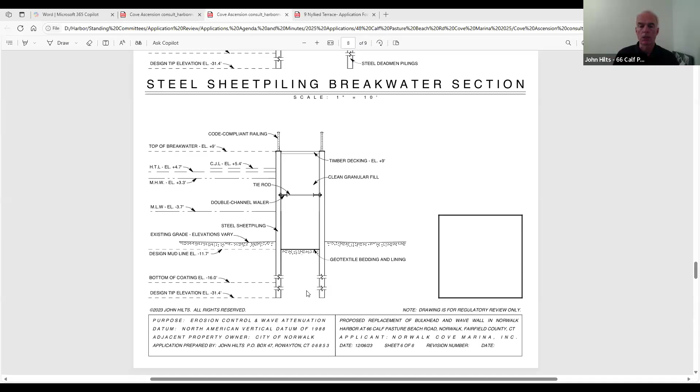But the anticipation is that primarily the backfilling will be excavated material within geotubes placed inside the breakwaters. I got you. Oh, all right. Well, that's certainly reinforcing that structure right there. There's no question about that.

Pending the additional information, yeah. All right, so we'll do that, John. We'll get together a response to you with regard to future plans, and we'll table this till next month. We'll put in some of the requirements as far as the length of the breakwater and distance from the channel line, Federal Navigation Channel, and as I said, we'll send you those comments.

I appreciate it, and if you think of anything else, throw it in there. Will do. All right, thanks. Thank you, John, for the other stuff. Good evening. Yeah, well, that's good.

Just to note this, it would be roughly 6.5 feet high, 5.5 feet high at low tide, at high tide, and 12 feet of corrugated steel exposure on a 300-foot long wall at low tide. At low tide.

So it's not just going to be a hazard. Well, nobody's going to hit it in the daytime because it's going to be really big and ugly and covered with shit. But maybe at night I worry about it, people do stupid things in boats at night. Well, maybe with proper lighting and flashing, the light's going to be 15 feet up in the air at low tide. It's also going to be good for advertising, we can rent that space out for signage at low tide. Could be lit. It's a billboard? Yeah, a billboard. It'd be absolutely fabulous. Welcome to Norwalk. Or just regular old graffiti.

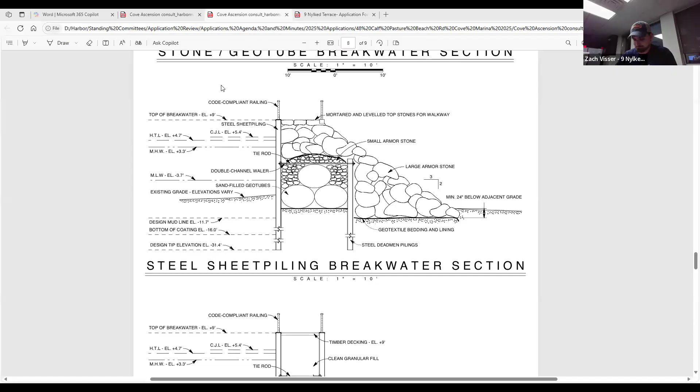Okay, good. So let's see, where's that? Let me see if I can get that. Where is that? Oh, here it is. Okay, so basically what you're requesting is that we bring everything into compliance based on the previous work that was done.

Now, according to DEP, they were issued a notice of violation and a fine was paid. I don't believe there was a monetary aspect at the moment. The owner did the work under the impression that it was maintenance, and DEP felt it was more of a COP. So they were just requesting a COP after the fact.

Because we do have a notice of violation here, and what they pointed out is that within 90 days of issuance of this notice, please submit a certificate of permission, which you're doing right now, the application to seek authorization to retain the repairs completed to the existing stone and concrete knee wall. The COP application materials can be downloaded, and they give you a website. Please be advised that you will need to sign a consent order and pay a civil penalty for failure to obtain appropriate authorization prior to completing the work.

And they pointed out that not later than 21 days after issuance of this notice, they want you to submit an enclosed compliance statement explaining how you propose to bring the site into compliance. And that's what you're doing now, right?

Yeah, we received a note today from DEP indicating that a fine has been paid and is put into that supplemental environmental project fund. Yeah, I believe they actually had to pay double the COP fee, one for the COP and one as a fine, now that I recall.

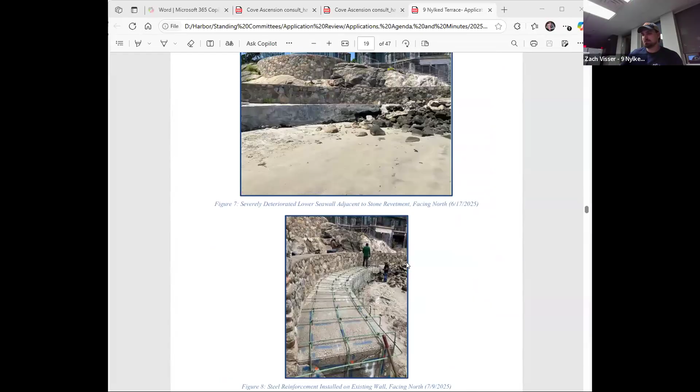What's the COP fee? You said this is double the fee, or the fine was equal to the fee. I believe it's $600. It's not much of a fine, really.

The main issue DEEP was notified about was the person thought this was an entirely new structure. Well, if we look at our site here on the screen, this is what was done here, right? You had rebar all in this area right here, and then you filled up the gaps with concrete. It was approximately 6 to 8 inches of resurfacing and refacing. So I guess the neighbor thought this was all new construction here, but it isn't all new construction, well, it's new construction on top.

It was recap on top of what was already there. They raised it. Yeah, and again this is the lower section, which doesn't have as much effect of raising as if it were the upper section. Right, so this was a section here that was reinforced, basically down in here.

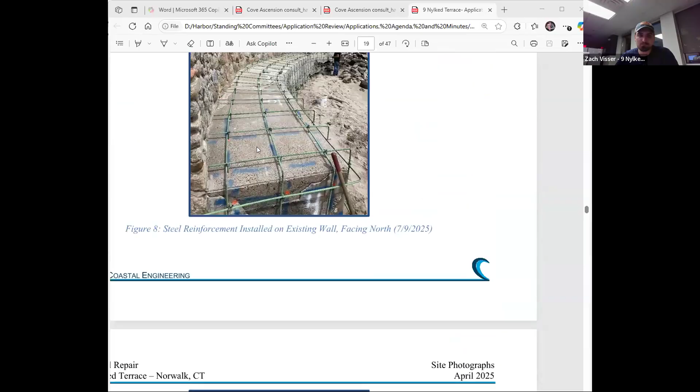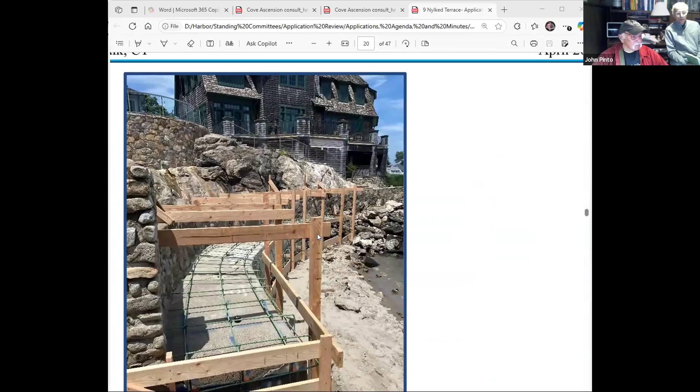When a contractor does work like this or is retained to get a permit, do they not ask for a copy of the approval, or how does that proceed? When you design this, I'm just curious, does the contractor care if there's a permit issued, or do they just go ahead and do the work? Again, they were doing it under the assumption it was maintenance, which would have been included in other permits where the wall was retained.

Typically a contractor is responsible for getting all required permits for a project like this. Building permits and anything like that would be handled by the contractor, typically not by us. But again, since the wall is included in a historic permit application, the owner just assumed he could do this minor repair as part of maintenance, as it was deteriorating.

I'm not looking at this as minor repair. This looks like major repair. It's quite a reinforcement of the existing structure.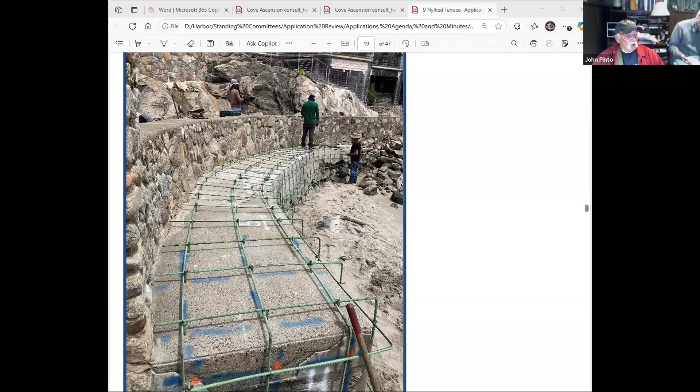Yeah, most of the reinforcing is just to ensure that it stays together and ties it together, because obviously if you just pour the concrete on top, it won't hold. The rebar is there to help reinforce the concrete that's all poured in there. It's both the fascia and also the top of the wall itself.

Was it a 2-inch overlay all around? I think it was probably more than 2 inches, probably 4 inches. I think it was 6 inches. Wait a minute, it was approximately 6 to 8 inches around, with 3 inches of cover, and then 3 to 4 inches from the bar to the existing.

All that framing in the next picture, is that for a deck above this? Yeah, this is where they all filled in, right here. I don't know about the slide below this.

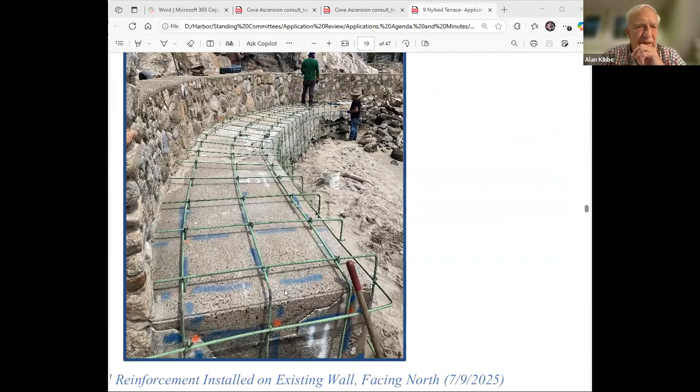What's all the timber? Was that just to hold the forming? Form work for the concrete. Fine. There should be some photos of it post construction.

I believe the first photos - oh, the very first one, yeah, and this here - this was an existing condition. If you go up a little bit more, this is what it looks like now. There's a couple more up higher as well. As you can see, it's not a significant change.

This is all the new construction here, right? Okay, yeah, you can see the difference in the concrete texture here.

Well, like I said, if you have no objection to this, you have to have the statement that it's not to set a precedent - you know, dealing with the future, we don't use that after the fact. And that we would again reiterate our statement to DEP, that we'd ask DEP to provide notices of violation to include to the Harbor Commission when they're issued. Well, that's what we've done in the past.

The reason for doing that was that there was a provision, and now the money goes directly into that supplemental environmental project fund. But there was a provision where the applicant or the person fined could agree to direct the funds to their home harbor - the harbor in which the violations took place. Now we're told that we have an opportunity to apply to that supplemental environmental project fund directly.

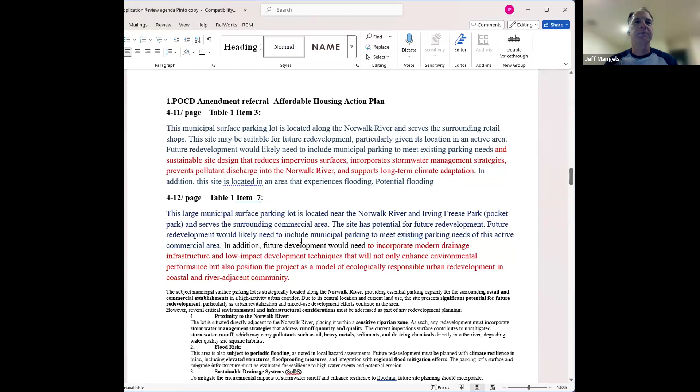I have something I'd like to say, John. In 4-11, John, you said 'suitable site design.' Did you mean suitable or sustainable? Where, 4-11 in the red, up top? 4-11, oh, 4-11, yeah, did I say sustainable? What did I say? You said suitable. Oh, I'm sorry, sustainable. Yeah. Okay.

Sustainable site development, yeah. So these were the two proposals. Did I make a comment? John, I'm sorry, Jerry, go on. Yeah, I have something I'd like to say about this, sort of an overarching comment.

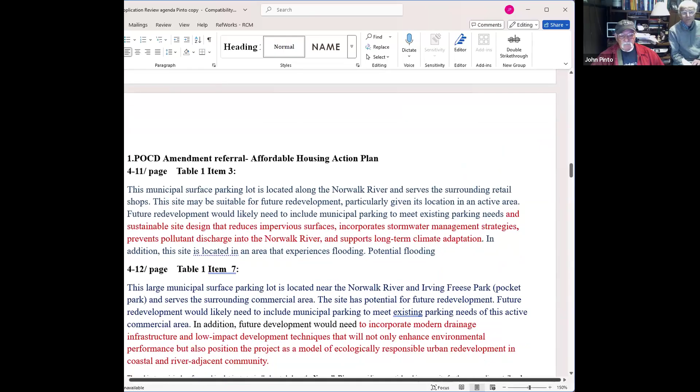Regarding the Affordable Housing Action Plan, last night there was a bill passed in the House of Representatives, HB 5002, referred to as the Housing Omnibus Bill. It's quite controversial because it provides quotas for each community to meet fair share housing, and it provides for as-of-right residential development in commercial zones with no parking requirements. It effectively eliminates planning and zoning hearings and approvals in certain circumstances. The concern many people have is that these initiatives and goals of increasing housing are superseding or given higher priority than environmental conservation goals.

I think this is a big deal in a lot of communities. So my thought was, as other commissions and towns have looked at these affordable housing plans, it's worth making a comment that within the coastal management area, the affordable housing plan shall not alter, supersede, or diminish environmental protections, including floodplain management requirements and coastal area management requirements. Affordable housing initiatives should not diminish an effective city program of corrective and preventive measures for reducing flood damage.

Then there's the big issue of how the concept of resiliency is applied. My experience and that of others is that the purpose of resiliency planning is to reduce the vulnerability of existing development and accelerate recovery as it applies to floodplain management, but it's not for the purpose of arguing for or supporting additional floodplain development. That's a misuse of the resiliency concept. You hear attorneys and developers now arguing that we can build more in the floodplain because it will be resilient, and I believe that's a misuse of the policy.

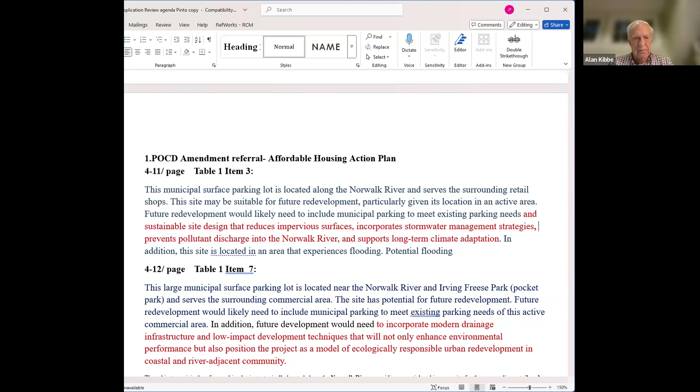If not, I would make a motion, John. I'd like to ask for a motion for accepting what we have, this in the red font here, to be included with a letter to planning and zoning. Second that. All those in favor? Aye. Aye. Okay.

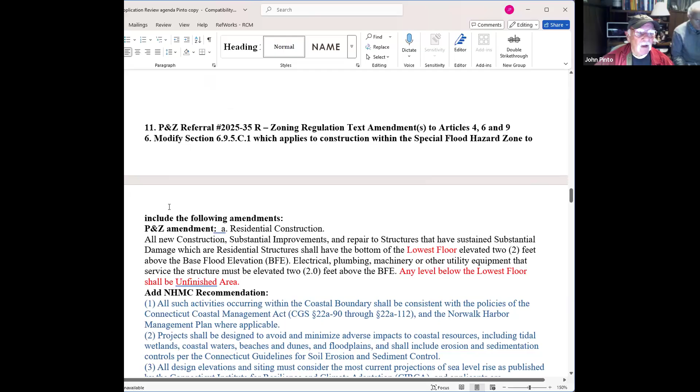The next, maybe a little more involved item, again planning and zoning's amendment for referrals to zoning regulations in the text amendment. They gave us specific reference to articles 4, 6, and 9 dealing with construction within special flood hazard zones, to include the following amendments. You can see the outline right here.

The black font here is planning and zoning's statement that they wanted, incorporated in their document. What was down here was reviewed by the ARC committee with regard to recommendations that the Norwalk Harbor Management Commission would make. What is in blue here would be recommended in place of the residential construction language they've shown.

What we recommended in place of what they have: that all such activities occurring within the coastal boundary shall be consistent with the policies of the Connecticut Coastal Management Act and the Norwalk Harbor Management Plan where applicable. The project shall be designed to avoid and minimize adverse impacts to coastal resources, including tidal wetlands, coastal waters, beaches and dunes, and floodplains, and shall include erosion and sedimentation controls per Connecticut guidelines for soil erosion and sediment control. And, all design elevations and siting must consider the most current projections of sea level rise as published by the Connecticut Institute for Resilience and Climate Adaptation.

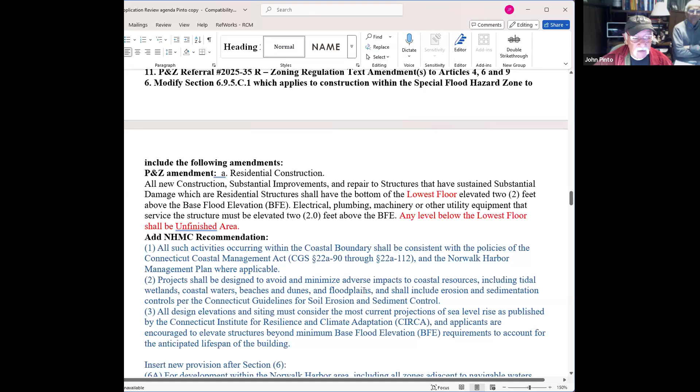That's what it would include. Applicants are encouraged to elevate structures beyond minimum base flood elevation requirements to account for the anticipated lifespan of the building. That would be our addition to that comment.

There was also an insertion below that: for development within the Norwalk Harbor area, including all zones adjacent to navigable waters, enclosed areas below the base flood elevation plus 2 feet shall be sited and designed to preserve public visual access to the waterfront where applicable and practical, through application of appropriate building scale, orientation, and vegetation management, and prevent discharge of untreated stormwater runoff into coastal waters through incorporation of best management practices, such as pervious paving, rain gardens, vegetation buffers, and on-site stormwater retention. That would be after their section 6.

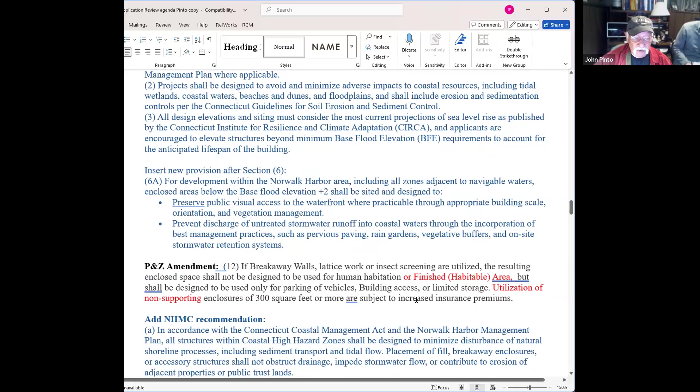The next section was an amendment, this on section 12 they had, dealing with breakaway walls or lattice work inserted in their area. This is planning and zoning's comment that they asked us to comment on.

The committee thought the additional recommendation should be: in accordance with the Connecticut Coastal Management Act and the Norwalk Harbor Management Plan, all structures within the coastal high hazard zones shall be designed to minimize disturbance of natural shoreline processes, including sediment transport and tidal flow. Placement of fill, breakaway enclosures, which this section is all about, or accessory structures shall not obstruct drainage, impede stormwater flow, or contribute to erosion on adjacent properties or public trust lands.

All applications for construction or substantial improvement in the coastal hazard zone within the jurisdiction of Norwalk Harbor shall be reviewed for consistency with the harbor management plan by the Norwalk Harbor Management Commission prior to the issuance of any zoning or building permit. That would be for section 12.

Now for section 9, they asked us to review. This dealt with half-story buildings - I'll show you here. This is their recommendation in red, all new that they propose.

What we're recommending from the ARC Committee is that in the coastal boundary and within the special flood hazard areas, a half-story located below the base flood elevation level plus 2 feet shall not be designed or used as a finished habitable area - that's basically taken from their verbiage. Such spaces must comply with FEMA technical bulletins 1 and 2, and shall not compromise required flood openings, dry or wet flood proofing, and structural integrity.

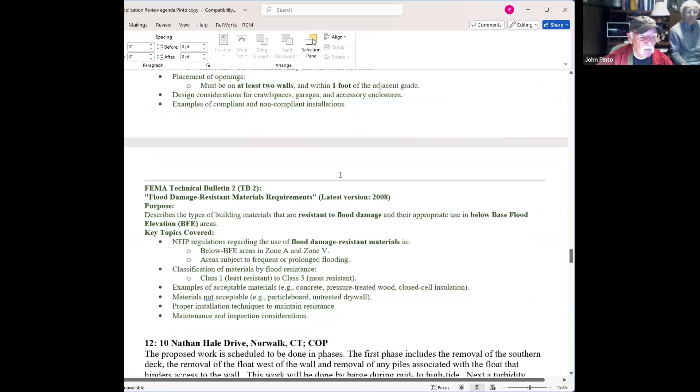And other than that, those are all of the comments that we would have for that particular POCD.

Alan, you're muted. That's why you can't hear me.

So did your group review it? Yeah, I had Chris and Matt, we all reviewed this, and those are the comments that we came up with. And is it your group's recommendation that the commission accept it? Yes, that's what we're moving forward.

So as opposed to what we did last month, those were statements that I took upon myself to review. In fairness, it was not reviewed by the ARC Committee, that's why we tabled it, and the full commission had full review of that. Now this time, all three of us reviewed this particular document.

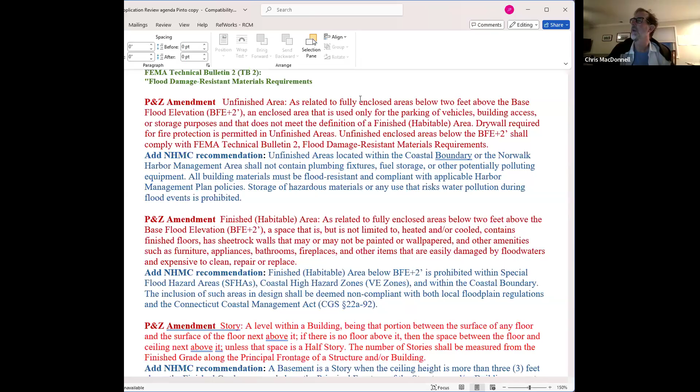I can't help myself, there's a little bit further up. They talk about attics, but we're talking about it being below the flood zone. Where is that, Chris? Well, they talk about the roof and the rafters, yeah, this one, half story. Well, this is what they have. They talk about it, but this is for attics. It says: the level within a building or structure, which may include a ceiling whose height measured between the floor and the bottom of the roof rafters does not exceed 7 feet, blah blah, et cetera. This is right here, right?

Yeah, dormer, this is for upper stories. So talking about base flood elevation is kind of... well, it says here, let's see, the roof whose total floor area does not exceed 50% of the floor below and must be set back a minimum of 5 feet, from all building surfaces.

I took it to mean, as I said, they're talking about... at least that's what we talked about, in the coastal boundary and within the special flood hazard areas, a half story located below the floodplain. This includes what a half story represents right here. Well, it's kind of a moot point because it's for an upper floor, it's for an attic, if you build a half story above an existing structure below the roof rafters. Okay, all right, that's that. But I was taking this as existing, for example, what was considered a half story.

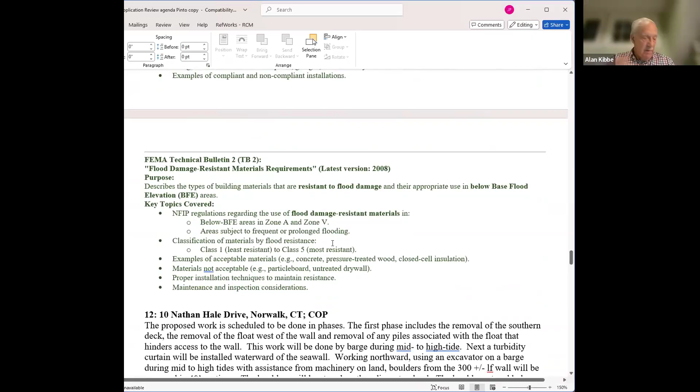We're done. Dr. Pinto, it's 8:28, should we break for 5 minutes? Well, it's up to you, Alan. I have no problem. I'm just about talked out myself, but I apologize, I have to leave at 8:30.

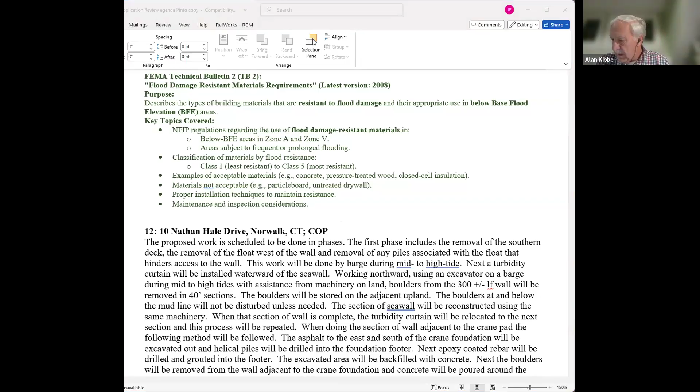In the interest of time, I'm not going to have a report tonight, except Jeff Stedman, are you prepared to talk about today's meeting concerning the Veterans Park dock? I'm not, no. Did you attend the meeting? I will just talk a little bit about that today. The Veterans Park dock, we had a meeting today.

In sending out their bid package, they had not copied me on all of the drawings and such, so I had a lot of comments, and it turned out they had moved one step beyond without letting the Harbor Commission know. So I have received a secondary set of the current drawings going out to bid, which I will review tomorrow and make any comments. My only interest is accommodations for our mooring fields, that we have adequate places to put dinghies, load our boats on city moorings, and so forth. I'll do that tomorrow when I have a chance to look at those prints. The plan is to get this project started this fall, with a spring completion by May.

So it's very- were you able to give? I'm sorry, I wasn't able to attend, I got overbooked at my paying job. Were you able to give them my comments? Yes. Yep, okay.

We'll see what changed from the old drawings, the drawings you had as well, Chris. A lot of things had been improved, they just neglected to copy us. I think they screwed up one of the slips where they put a kink in the dock. Yeah, I think that's correct. So that will require some. The other stuff was more minor, about placing cleats and what they should pave in the parking lot.